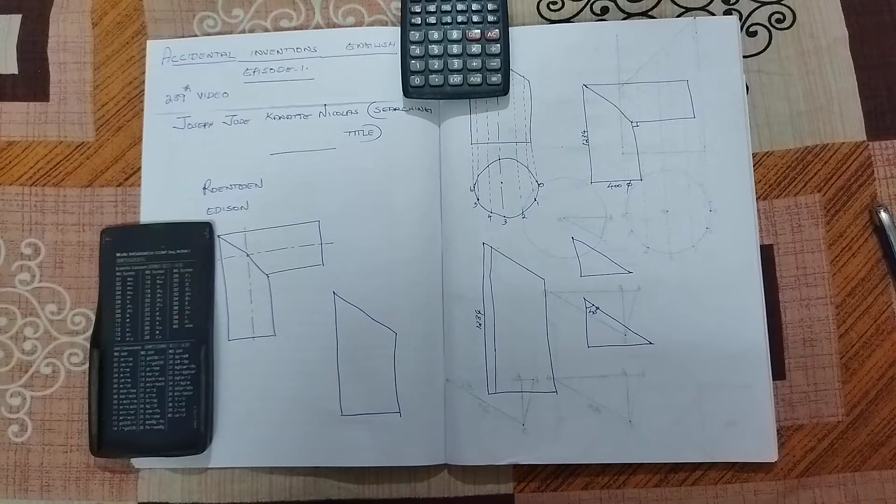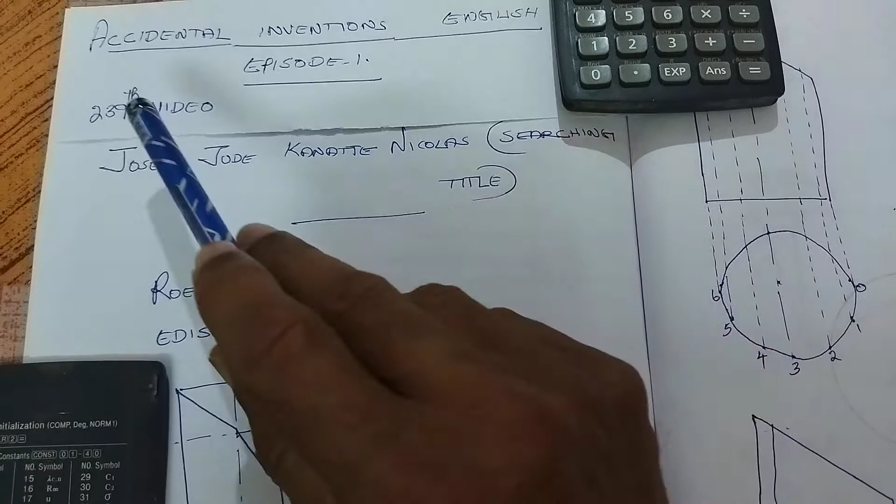Sometimes you may be thinking it may be the reason that today I am going to do the 239th video. It may be its reason, sometimes you may be thinking like that. But actually it wasn't. Today I start a new series, and its first episode is the 239th video. This series name is Accidental Inventions, English, Episode 1.

What is the meaning of accidental inventions? You know, most of the inventions have happened accidentally.

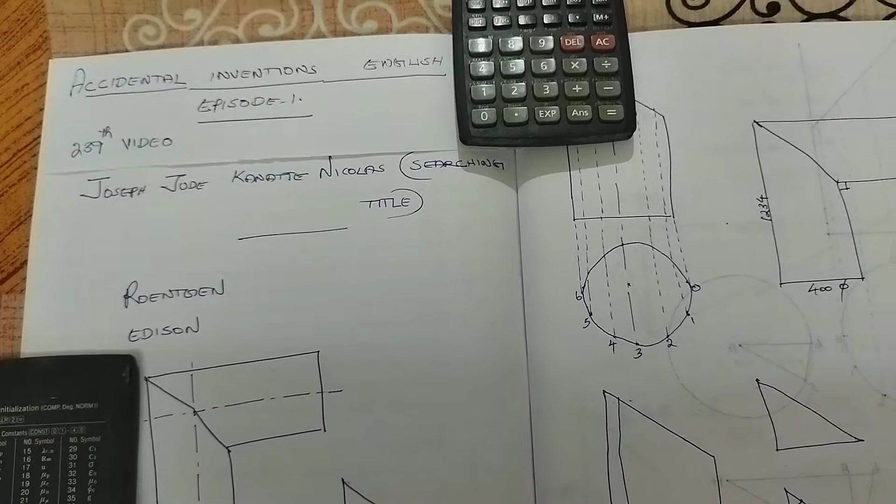If Röntgen invented X-ray, it was also an accidental invention. He wasn't trying to invent X-rays. He was in his experimental workshop experimenting on some other things, trying to invent something else. In between, some rays crossed his hands. He feared and removed his hands from there.

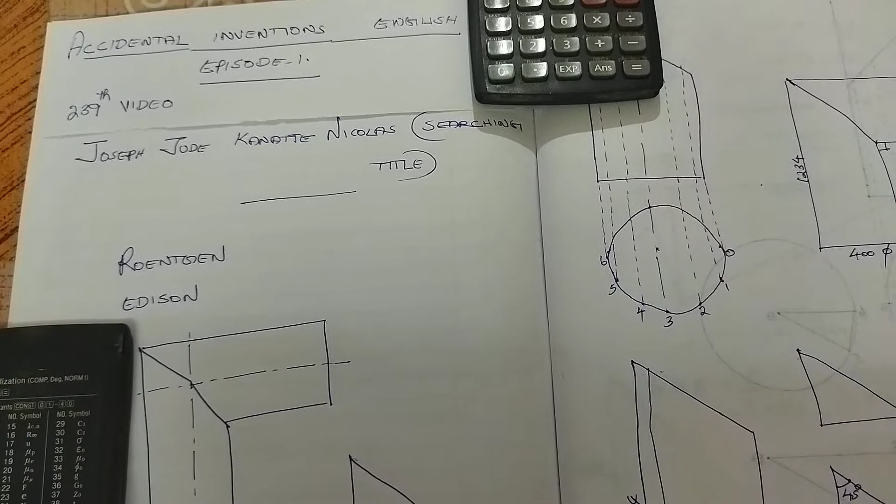Inventions happen accidentally. Some of the incidents happen accidentally, and when compared with this kind of inventors, this kind of scientists...

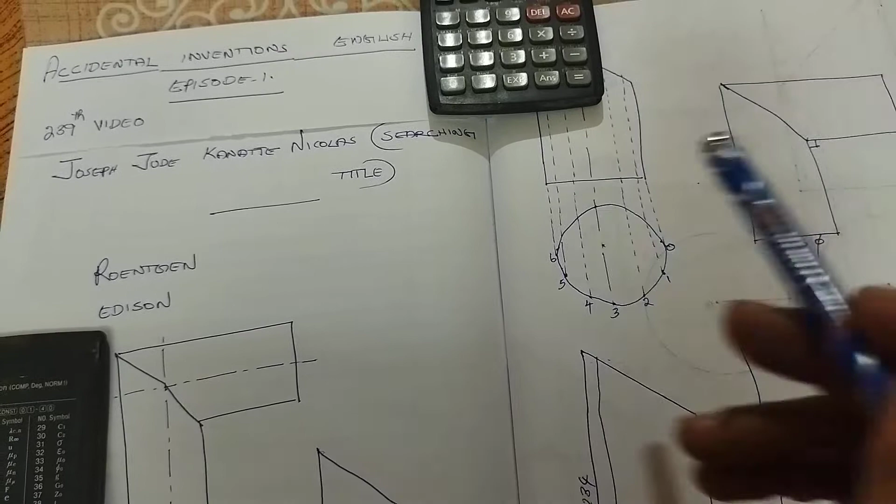Now I told about Röntgen who invented X-rays. If I say about Edison, he had invented nearly 2,500 good things. He has the patent of nearly 2,500 invented things.

But most of the inventors weren't able and expert, or they weren't brilliant when they were so young, especially in their childhood. They weren't expert, they weren't brilliant. Once, when Edison was a small boy, he could see...

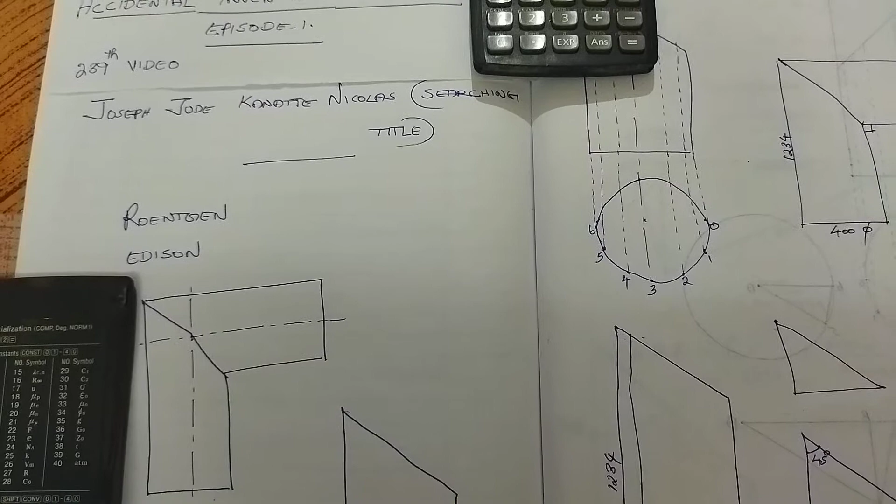one hen sitting on the eggs to give birth to its new kids. He watched it so curiously, and he was doing his first invention.

Now I told the word invention, but if I was writing that word in letters, I would have put an apostrophe above the invention, because what was he inventing in his childhood?

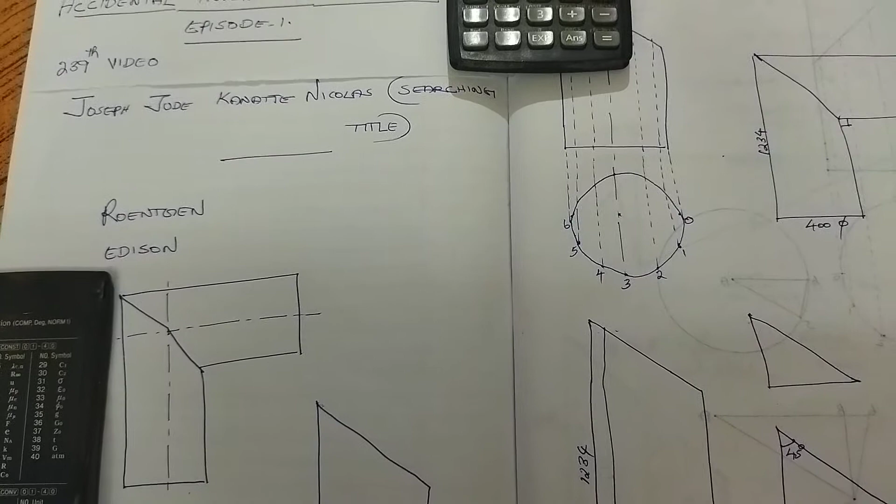He saw a hen sitting on the eggs to give birth to new kids. He too brought some eggs and started to sit on those eggs to give birth to new kids. His mother saw it and she scolded him. That is the childhood incident of Edison.

When compared with the childhood activities of some scientists, or the fearful atmosphere of these scientists, it means Röntgen also feared when X-rays crossed his hands. It was an accidental invention.

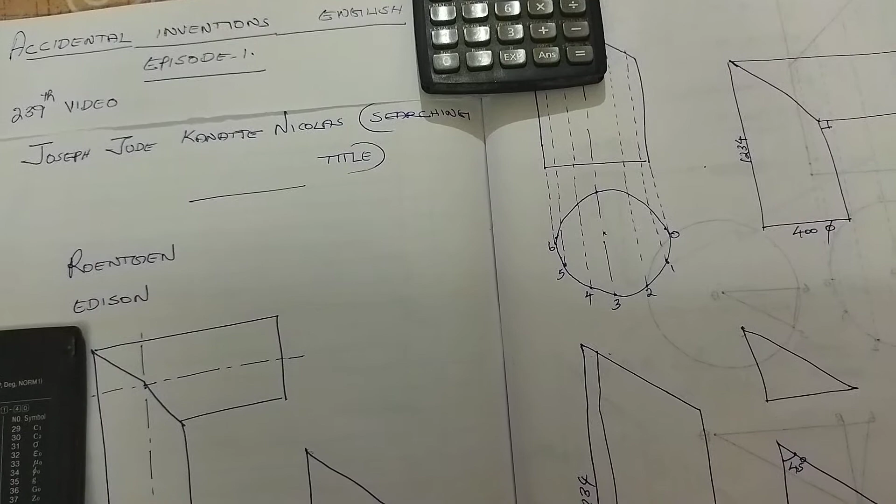So when we compare with so many inventions, most of the inventions happen accidentally. I too have got some accidents - it was road accidents, but I don't like to say about those road accidents now.

I would like to say about some accidental inventions. I too didn't think I may reach invention. I haven't invented anything like Röntgen, Edison, Newton or some other great inventors.

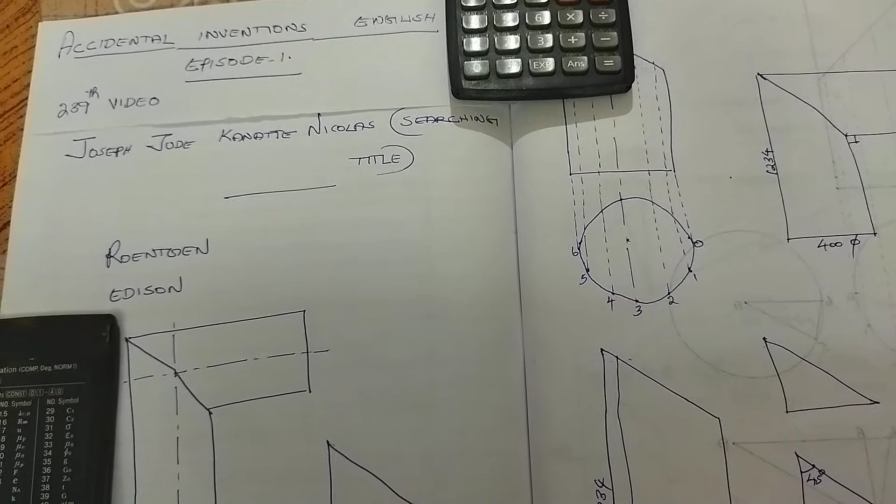But in my journey from fabrication to fabrication, so many calculations I had to do, so many developments I had to do, so many trigonometrical scientific calculations I had to do. I had taken a lot of time for those calculations.

So in between some calculations, I have thought, will there be a relationship with this value and the value of the origin? I will explain it when this video reaches its ultimate stage. We shall go to the matter.

I am so interested in fabrication, especially its developments. You know what is development. In so many videos, I have told you and I have taught you what is development.

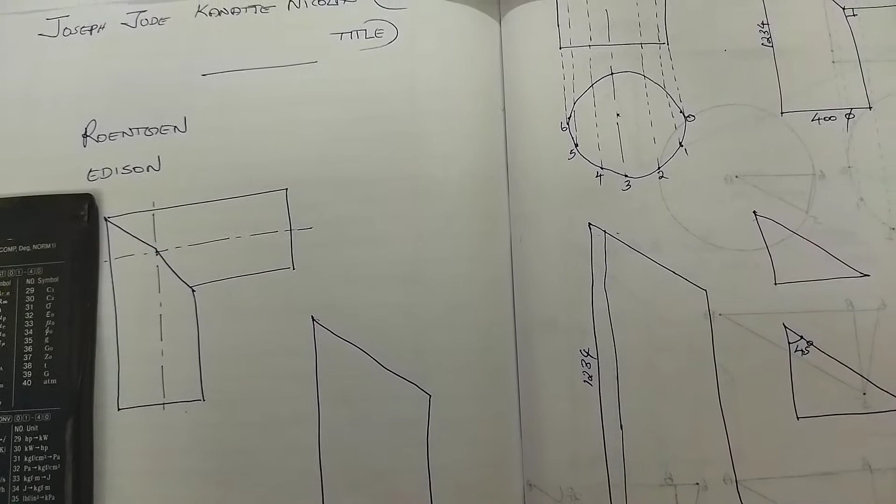If you make a cone, or if you make a square-to-round job, or if you make some other rolled jobs or bent jobs, before it is rolled or bent, it was in a plain sheet, a plain plate as a plain sheet or plain plate. It will be cut in different lengths, widths or different shapes. This shape, before it is being bent or rolled, there will be a shape.

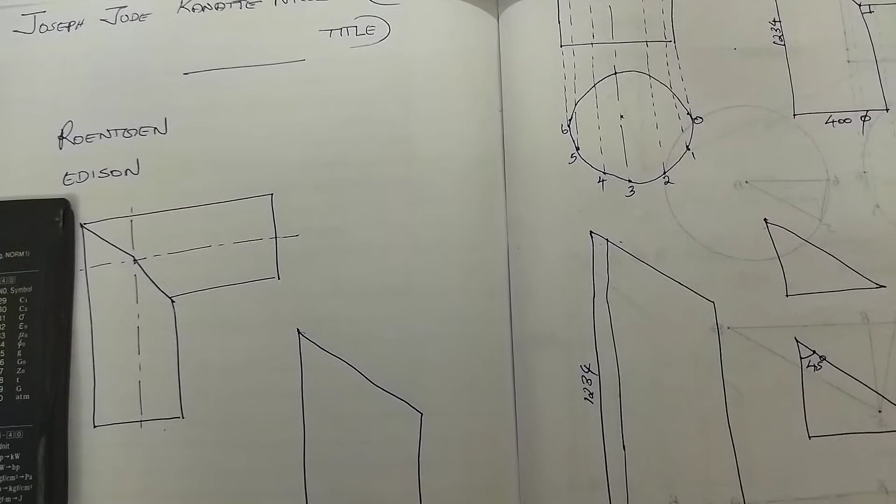There will be a structure. This shape is called development. If we have to make a cone, before making the cone, before bending, before rolling, it will have a shape. In that shape we will mark, cut, and be ready for rolling. Before rolling or bending, it will have a structure, one shape. This shape is called development.

Especially, I had to make these kind of pipes so many times. It is the approximate structure of a pipe which is going through a 90-degree bend. If we have to make this kind of pipe at 90 degrees, one pipe can be used and it has to get this kind of profile cutting.

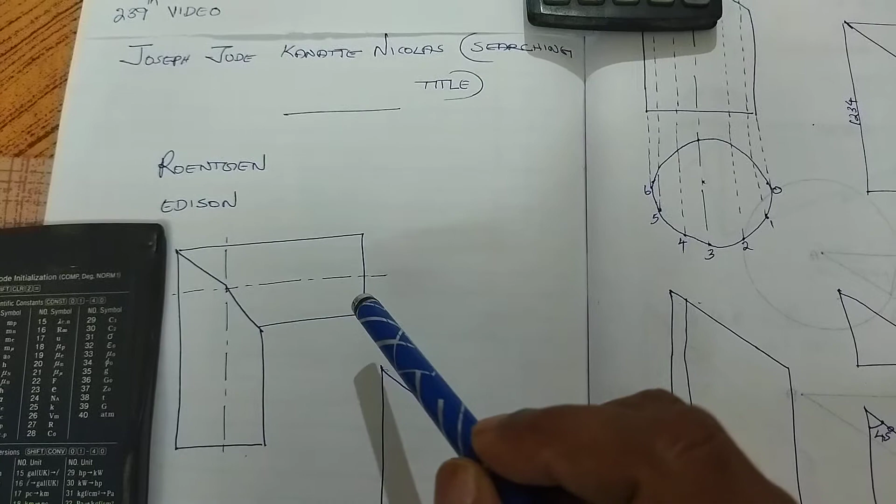When I did this sketch, it is not in a straight line because I was using hand sketches only. I didn't use scale or compass or protractor. You have to use scale, protractor, set square, compass and everything for writing these sketches in your notebook because you are studying only. Now I am teaching you with this kind of freehand sketches.

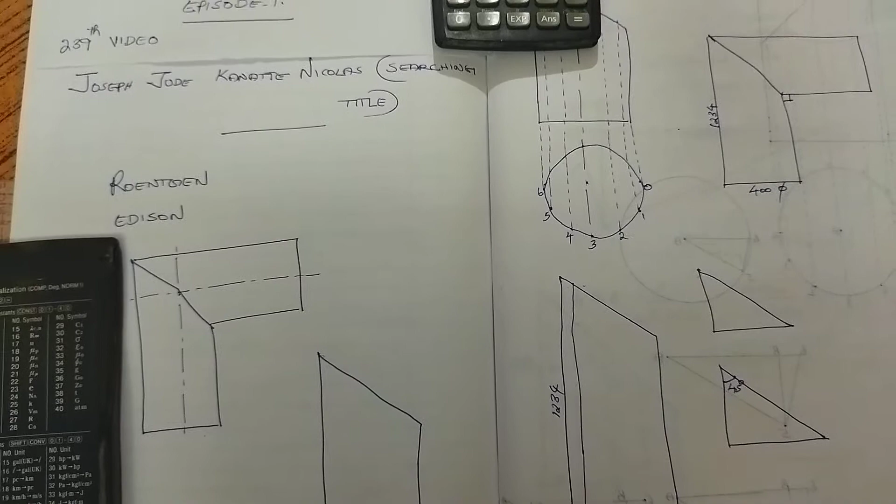If we have to make this kind of pipe, it can be cut in different lengths. This length and the next part's length, this length and this length, all lengths are different. If we cut this kind of pipe, different measurements have to be added: it is the lengthiest side, it doesn't have more length also, and it is the shortest side of this pipe.

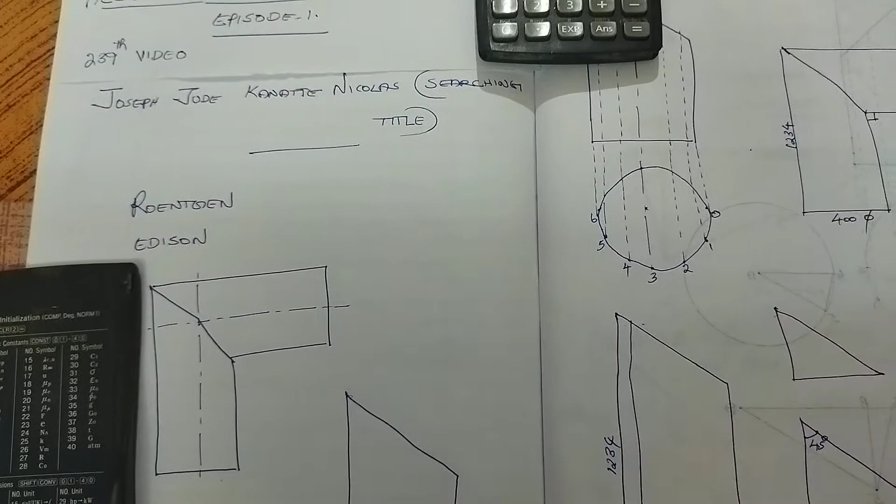So we can cut one pipe and make it like this, or we can roll or bend a plain sheet or plain plate and make it like this also. Both times we need calculations, trigonometrical calculations.

I have just drawn the picture of only this pipe here. It isn't a plain sheet or plain plate - remember, it is a pipe. We have to make this kind of pipe.

For that purpose, what do we have to do? We have to divide this circle. Its bottom is circle, its top is circle, in between every portion is circle, but it is the view of elevation, front view. So we are seeing it in this form. If we look from the top side, we will see a round shaped job.

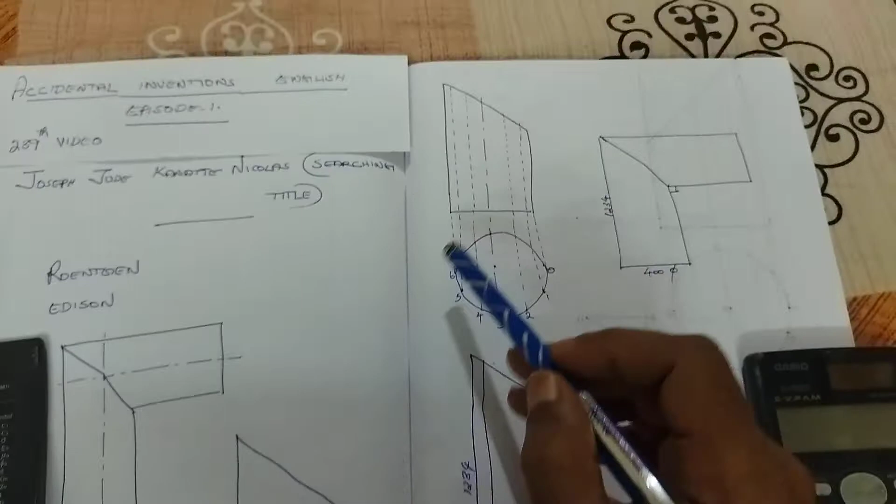Once again I have written it here - this is the elevation of this pipe. What is elevation? Elevation is the front view of a job. Its top view, when we look from the top side, is called plan. This is plan, the view from top. When we look from here, we see its front side, that is this side.

Okay, if we have to make its development, we have to divide this circle. It is a round shaped job like this. We have to divide it into 12 equal parts.

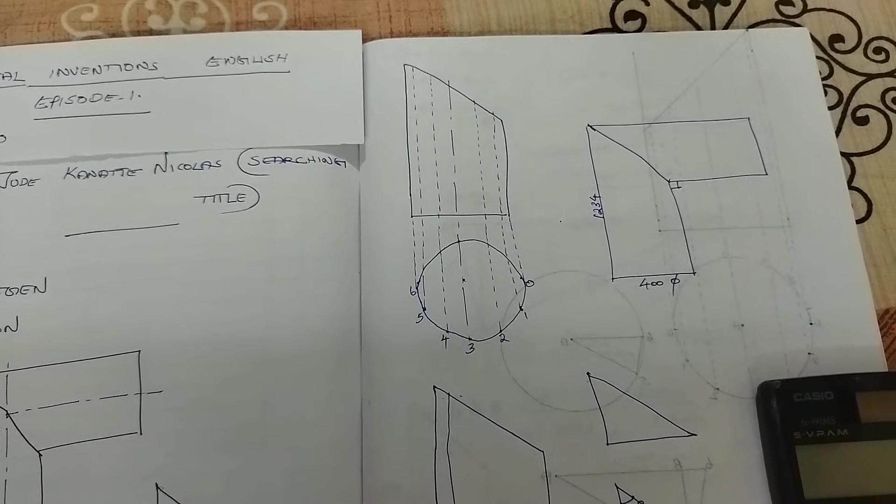If it is bigger than this pipe, 12 may not be enough for you. If you think 12 is not giving accuracy, then you have to divide it with 16 or 20 or 24 or bigger numbers. If it is a small pipe, there is no need to divide it with 12 - you can use 8 divisions or 4 divisions also. That is according to the diameter of the pipe.

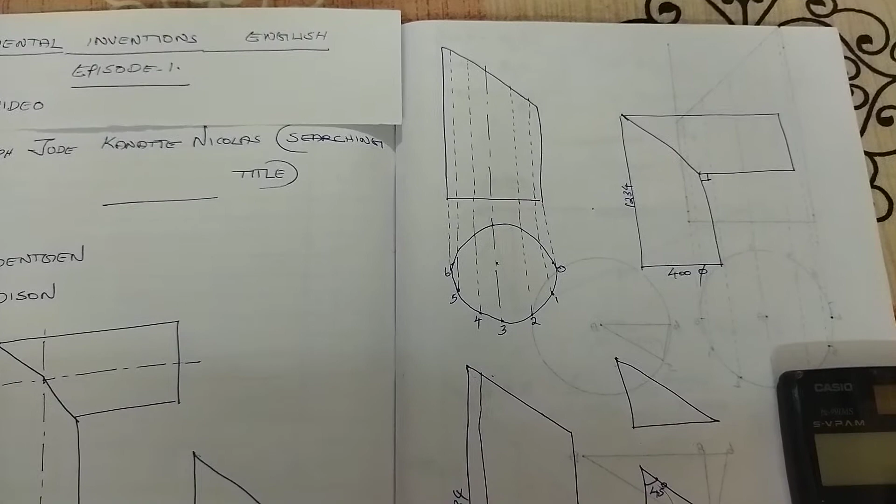If it is bigger, there should be more divisions for accuracy. Now I divide it into 12 parts. Most of the time I have got to divide it into 12 parts, then I had to undergo a lot of calculations.

Now we are going to make this kind of job. For its measurement, for example, we can think its length on the top side, the lengthiest side, is 1234, and its diameter is 400. And this pipe...

gets bent at 90 degrees. If it is a 90 degree bend, these two cuttings will be at 45 degrees. From here to here there will be 45 degrees, and here to here also there will be 45 degrees. 45 plus 45 is 90 degrees - 90 degrees it is going.

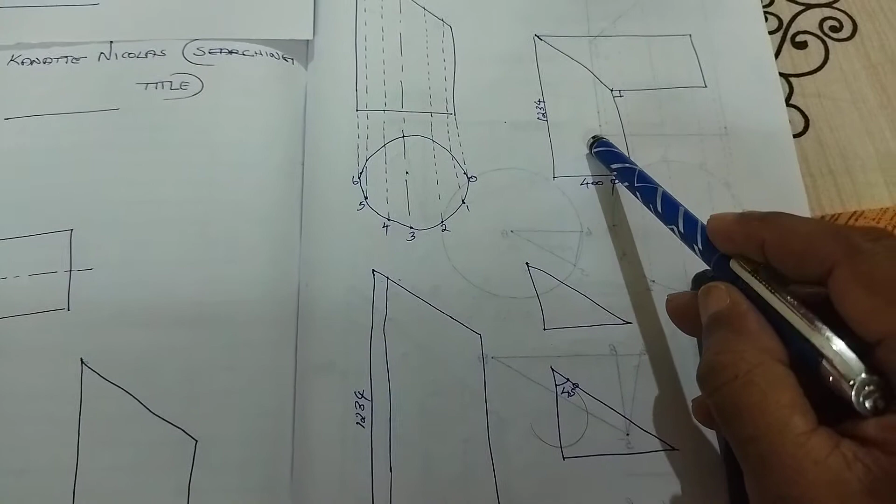So we shall make a pipe in this measurement. For making this pipe, we have to divide it into 12 equal parts. 0 to 1 is one part, and 1 to 2, 2 to 3, 3 to 4, 4 to 5, 5 to 6 - then it is 6 parts.

It is the half portion. This half portion has to be added here also, then another half portion will come - half portion plus half portion - one full round will be developed.

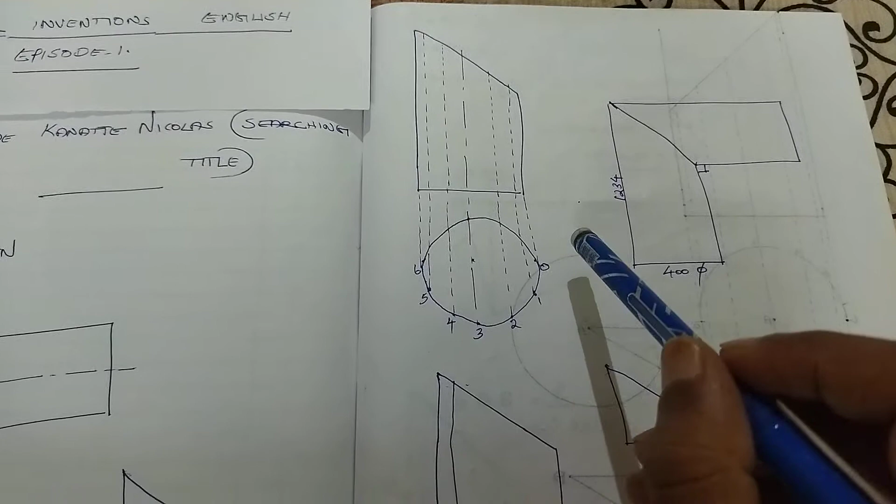I have used hand sketches, so in between the gaps are not equal. But if you draw this circle with a proper compass and proper scale and everything, 0 to 1 and 1 to 2 and all these measurements will be in equal distance in plan.

But this distance, 0 to 1 distance, visible in elevation, is not equal when compared with 0 to 1 and 1 to 2. 1 to 2 will be bigger than 0 to 1, and this one is bigger than this one and this one also.

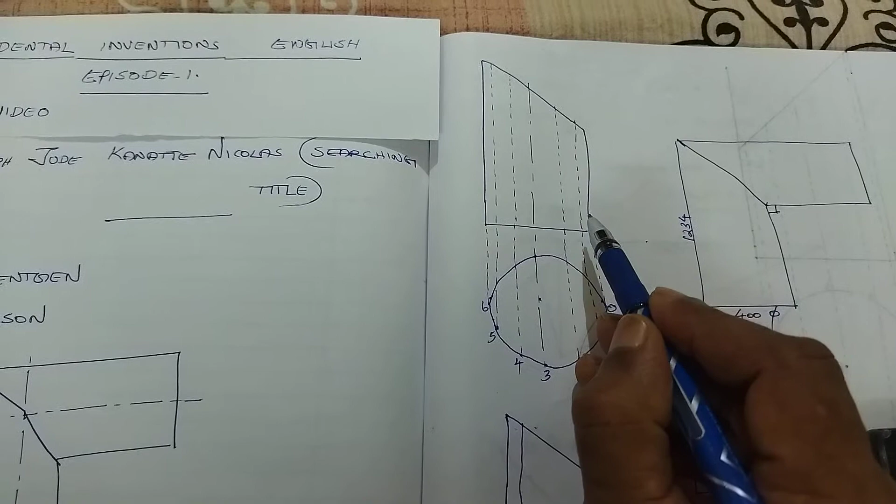And another thing - this 0 to 1, this 0 to 1, and this 6 to 5, here to here is 6 to 5 - these two widths will be the same, and widths from here to here, it means 5 to 4 and 1 to 2, will be the same.

This 0 is the point in round shape which is visible in plan. This 0 starts from here and reaches up to the bottom of this pipe. So from here to here is 0, here to here is 6.

But in elevation, 6 is visible from here to here, though it is top view. So in top view, we can see 6 as one point, we can see 5 as one point only, but here it is visible as one full line.

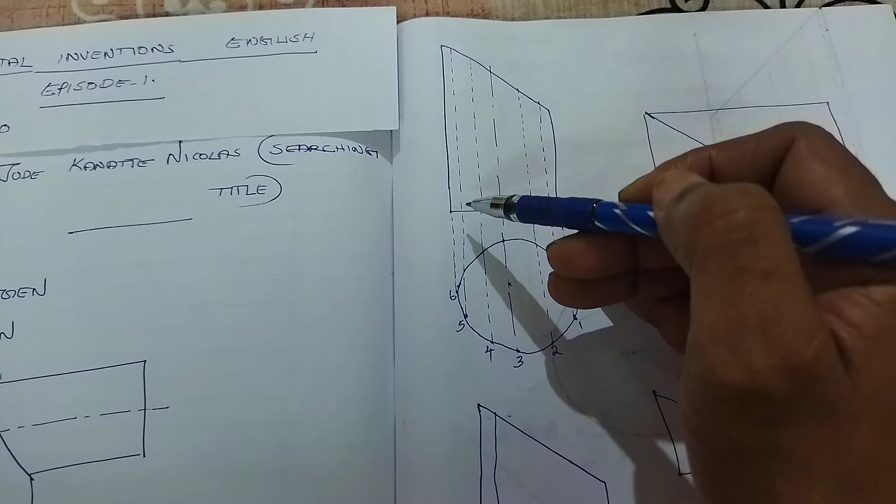This full line, 5, comes one more time on its other side. Only half a portion is visible; the other half portion is there too. So from here to here is the line of 5. Like that, one line will be on its far side also. One line is here and another line is here.

When we look from here, we see only this line of 5. That is this line. But if we look from the top side, we can see the 2 points of 5. This is 1 point of 5. This is another point of 5. This is 1 point of 4. This is another point of 4.

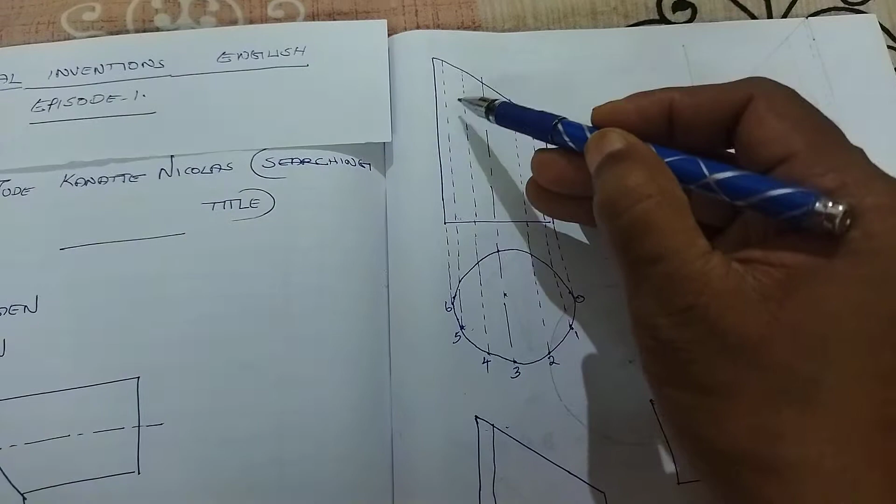But in elevation, we can see the full length of 4. From here to here is 4. But the opposite side 4 isn't visible here. But you have to think another 4 is there on the opposite side of this elevation. Okay.

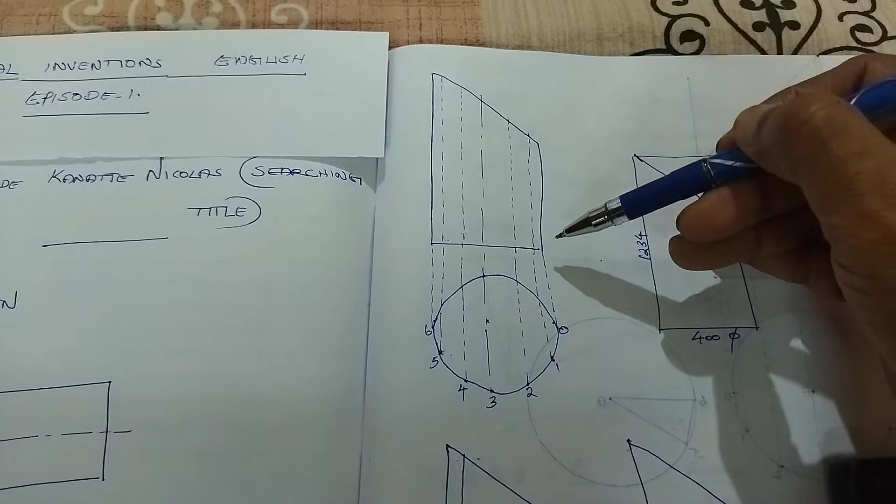So first of all, for making its development, this length differs from the length of 5, the length of 4, the length of 3, the length of 2, the length of 1, and the length of 0. When it reaches 0, we get the shortest length. This is the lengthiest side, and all lengths are different. And this gap is also different in different areas in elevation.

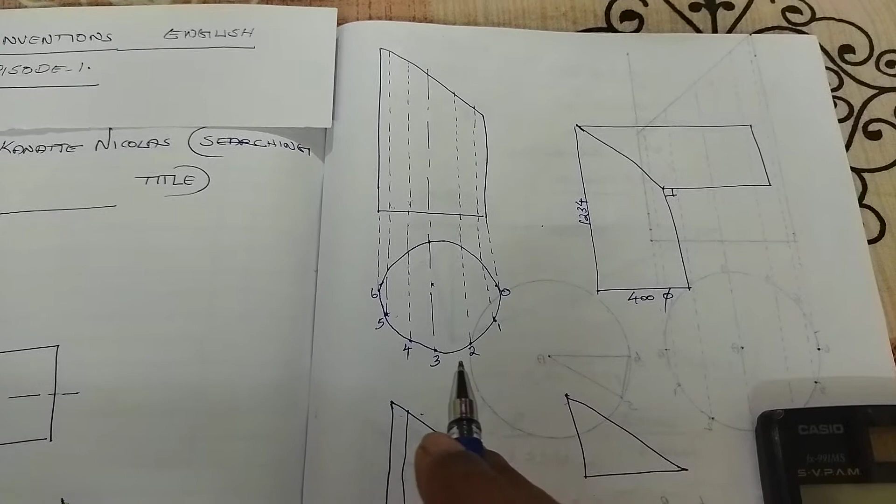But in plan, this measurement is visible as true length. This is exact length. So we can call this length from 0 to 1 in the curved portion true length. But this 0 to 1 is visible. This is the 0 line. This is line 1. From here to here is the true length, and this is non-true length because it is visible from this side only. If we look from this side, the points in the approximate center area will be visible as an approximate straight line.

So this much of curved area will be visible as approximately that much. But here a curved area is there. When we look from the top side, we see true length. But when we look from here, it will have a curved area; we see more curved area. From here, looking to the center, we see mostly plain area. When we look very near the 0 to 1 area, we see not an approximately straight area but more curved area.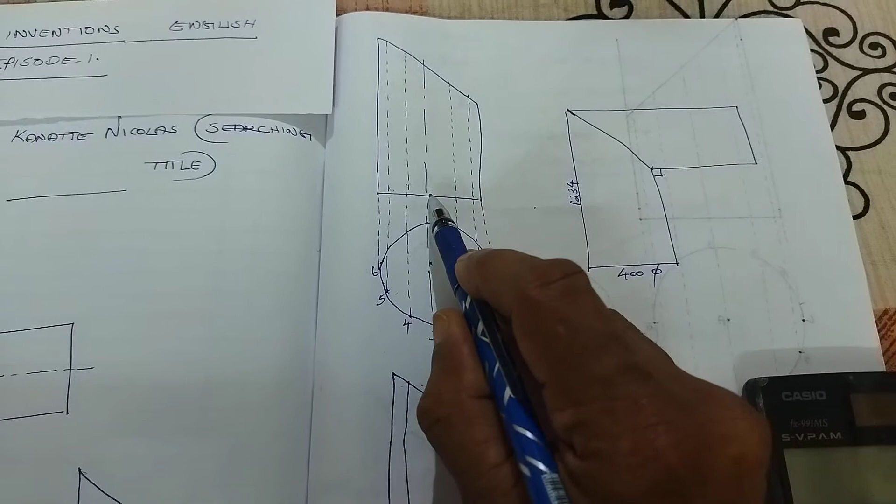So from here to here is only a little length, and here to here is much bigger. This length and this length are the same. When I drew it with my hands, this length got some more width, but it isn't actually true. When you do it in your notebook, you have to use proper divisions and draw proper straight lines. Then from here to here, 3 to 2 will be equal to this 3 to 4, and this 1 to 2 will be equal to this 4 to 5. Okay. We have to make this kind of job.

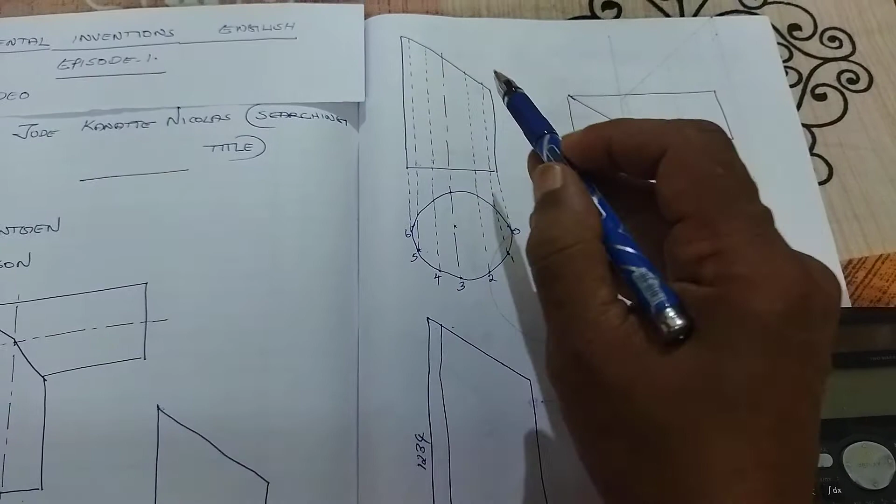Its first length has to be 6. We already have that measurement, 1234. And this 5, this is the line of 5. We have to find it out. How will we find it out? To find this 5, first of all, we have to get this measurement. If we get this measurement with this measurement and this degree, you know this degree is 45 degrees. We told about it first. I have just drawn this triangle here also.

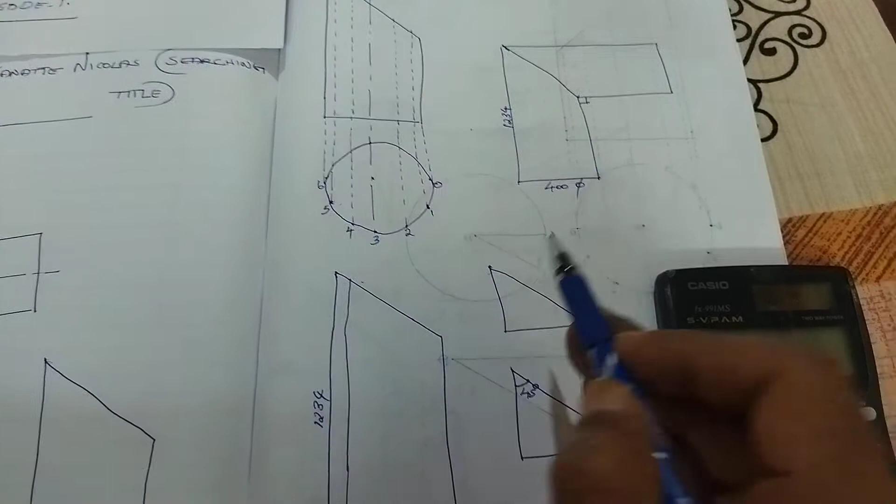This line is this line, and from here to here one line is there, that is this line, and from here to there one line is there, that is this line. If we get this line, we have to get this line; that is our aim. With this line and this degree, 45 degrees, we can find out this length, how much is coming from here to here. If we find this length and decrease it from 1234, we will get the length of 5 from here to here.

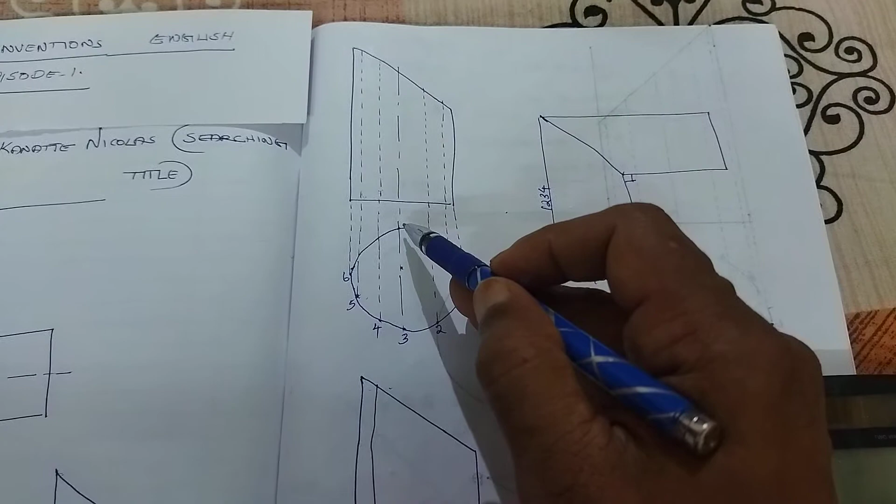Like that, we have to find out all measurements: 4, the 3 line, 2, 1, and finally 0. It doesn't have to be found out twice. If we have found out 1, it can be used for its opposite side also. If we have found out the measurement of 2, it can be used for this 2 also. If we have found out the measurement of 3, it can be used for the 3 on the opposite side. Okay. For finding out this measurement, I had to undergo so many calculations.

Once again, I have drawn those pictures here. In this picture, just listen. How will we be finding out the measurement from 5 to 6? This 5 to 6 is true length. We know how much this measurement will be. But we have to find out the non-true length.

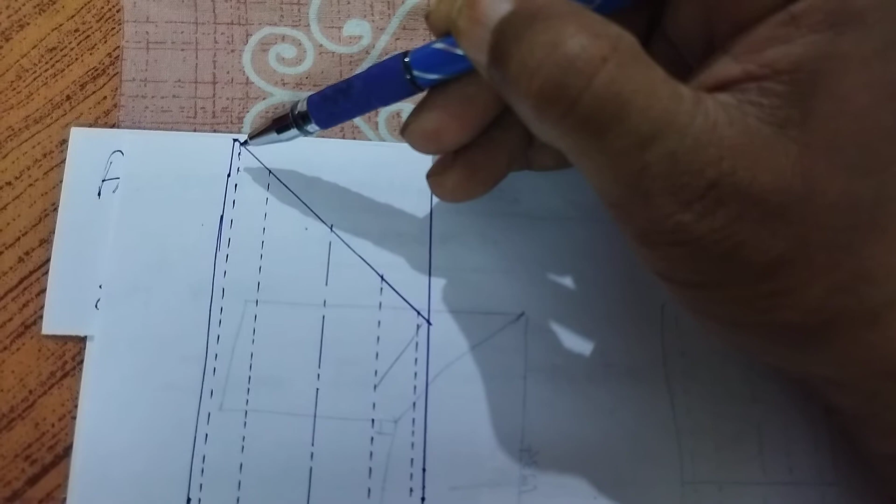This point is 5. This point is 6. This is non-true length. This non-true length we have to find out. Then only we will get the distance measurement from this corner to this point. This point means the 5 line ends here. From this line, if we draw a perpendicular to this line, it reaches here. This measurement we have to get. Then we can decrease this measurement from this total length 1234.

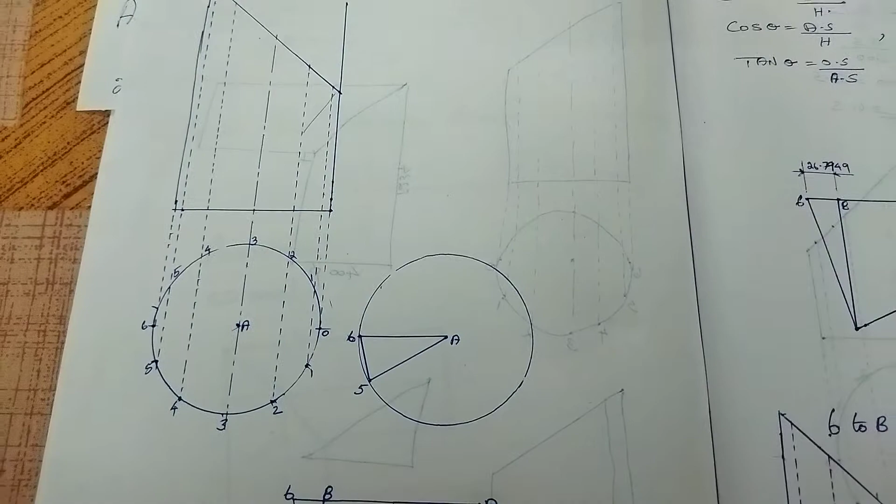Okay, we shall start to find out this measurement 5 to 6. When we find out this 5 to 6, already we will get the measurement of 0 to 1 also, because 0 to 1 and 5 to 6 are the same measurement, I have told you. And 1 to 2 and 4 to 5 both are the same measurement. And 2 to 3 and 3 to 4 both are the same measurement. Okay, we shall find out the non-true length of 5 to 6. How will we be finding out?

We can make a triangle using the points A, 6, 5. A to 6 I have drawn here, 6 to 5 I have drawn here, 5 to A I have drawn here. It is a triangle, but there isn't a 90 degree in this one, because from 5 to the top side we haven't drawn one perpendicular line. We have to make one perpendicular line. In this triangle there should be a 90 degree. That has to be with us for doing trigonometrical calculations.

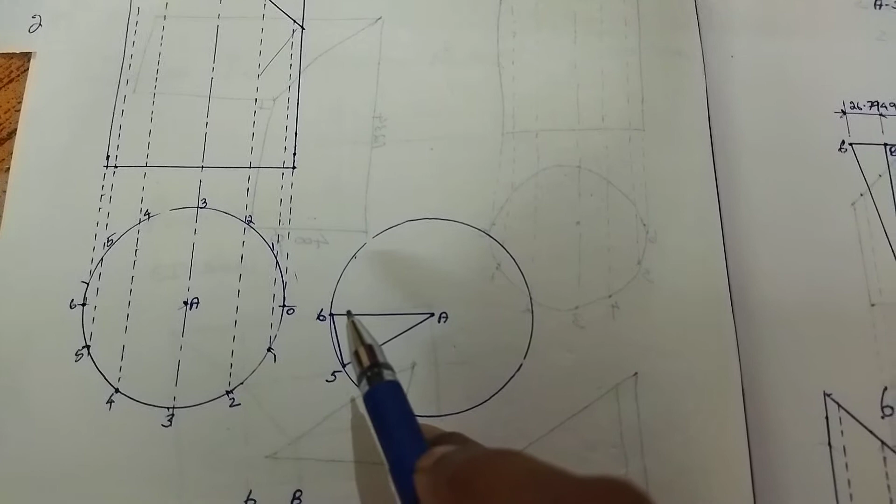Why did we draw this kind of triangle? If we make a line from here to the top side, which will be perpendicular to the line 6A, that has been drawn here. A to 6 I have drawn here, 6 to 5 I have drawn here, and 5 to A I have drawn here. And this 5 reaches in B. Then it becomes 90 degree.

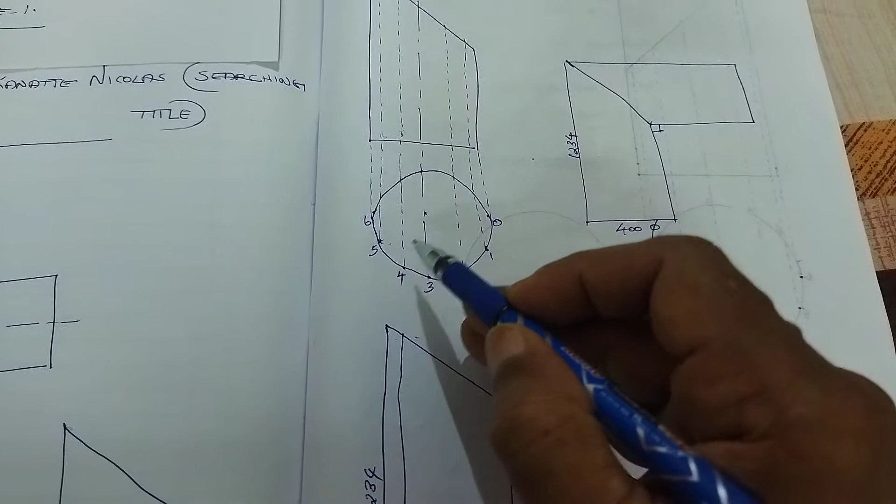If we find out the measurement of A to B, already we will get this measurement 6 to B, because everybody knows this A to 5 is 200, because in the last page we have told our diameter is 400. If diameter is 400, its half, the radius from here to here, is 200. All measurements from the center to the outer line of the round are 200.

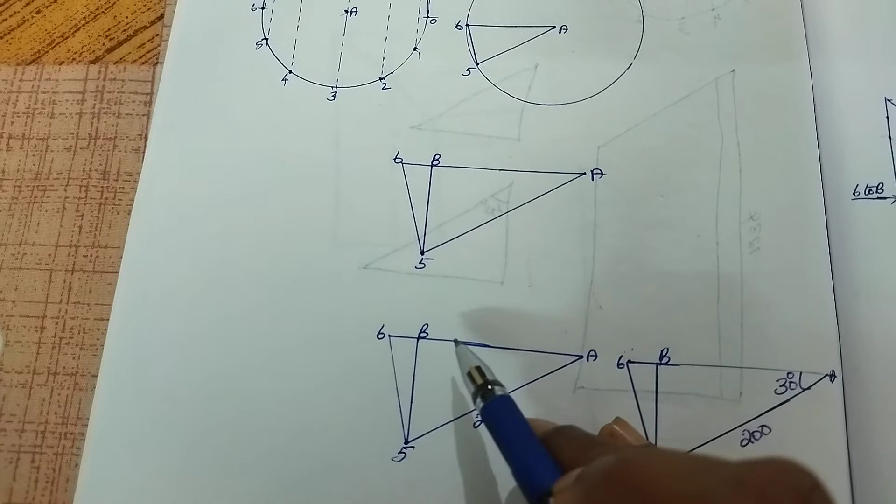Here to here is 200. A to 5 is 200. A to 6 is also 200. Those measurements I have written here. If we get the measurement from B to A, already we will get the measurement of 6 to B, because 6 to A is 200. 200 minus B to A will be the measurement from 6 to B. So we will get this measurement.

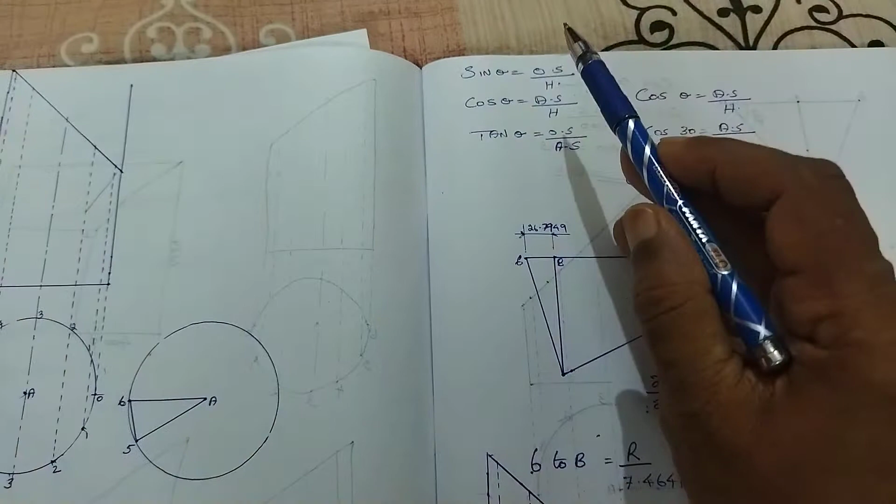If we have to find out 6 to B, we have to use trigonometrical calculations. I have taught you so many trigonometrical calculations. For that purpose, we have to use sine theta, cos theta, tan theta. Sine theta is opposite side divided by hypotenuse, cos theta is adjacent side divided by hypotenuse, and tan theta is opposite side divided by adjacent side.

Remember, we have divided this circle into 12 parts. 1, 2, 3, 4, 5, 6. Then again, the 7th portion is 5, the 8th portion is 4, the 9th portion is 3, the 10th portion is 2, the 11th portion is 1, and the 12th portion is again 0.

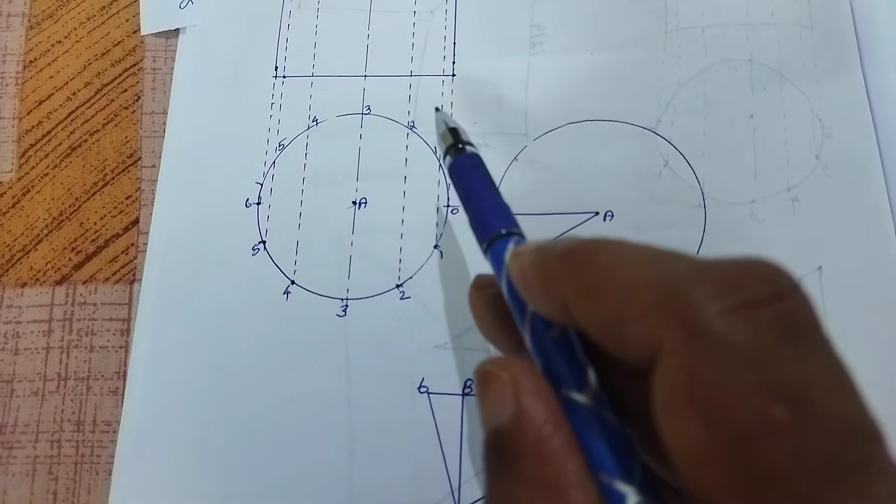So, for making one circle, one line has to start from here, and we have to draw one round making 360 degrees. 360 degrees reaches in 6 to A again. We start one round from the line A to 6, and it has to have 360 degrees, then again it reaches in 6. Two lines are matching. That is 360 degrees. So, this 360 degrees is divided by 12.

1 part's degree will be formed. How much it will be? What is the degree of 360 divided by 12? That will be 30 degree. This is 30 degree. This is 30 degree. This is 30 degree. I have written here 30 degree. This kind of 12 30 degrees will be forming, then one round full will be formed.

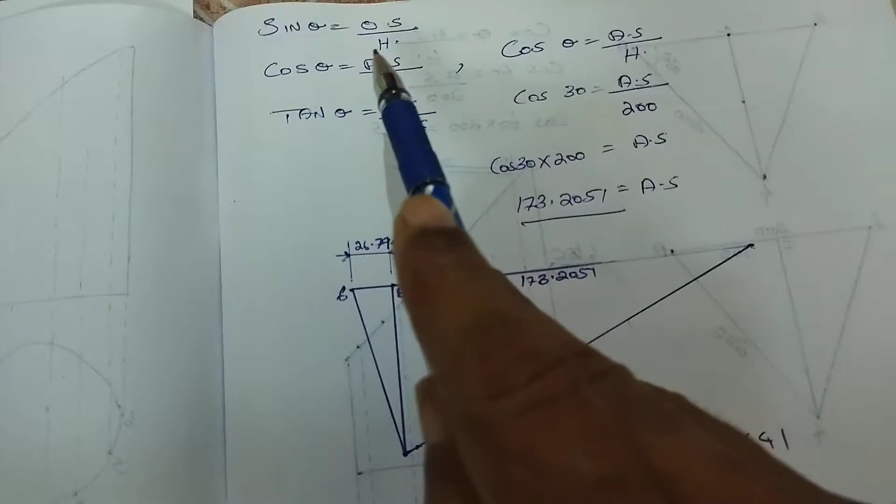Okay. Those all I have described in my earlier other videos. So, we shall come to the trigonometrical calculations. In these 3 formulas, which formula we can use? Cos theta can be used. If we use cos theta, we will have the measurement of cos theta, that is 30 degree, cos 30 degree, and adjacent side we don't have.

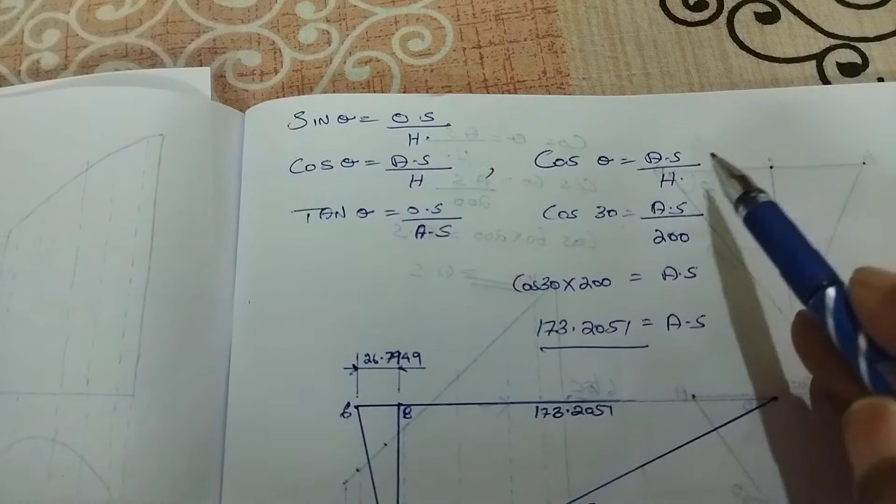Here to here is adjacent side. We have to get it, so we have to write just adjacent side only. Divided by hypotenuse we have. What is hypotenuse? This is hypotenuse. From here to here is hypotenuse. That we have. Okay. So, we shall use the formula cos theta is equal to adjacent side divided by hypotenuse. In this cos theta, theta is cos 30, and adjacent side we don't have, we have to write it here. And hypotenuse 200. From here to here is 200.

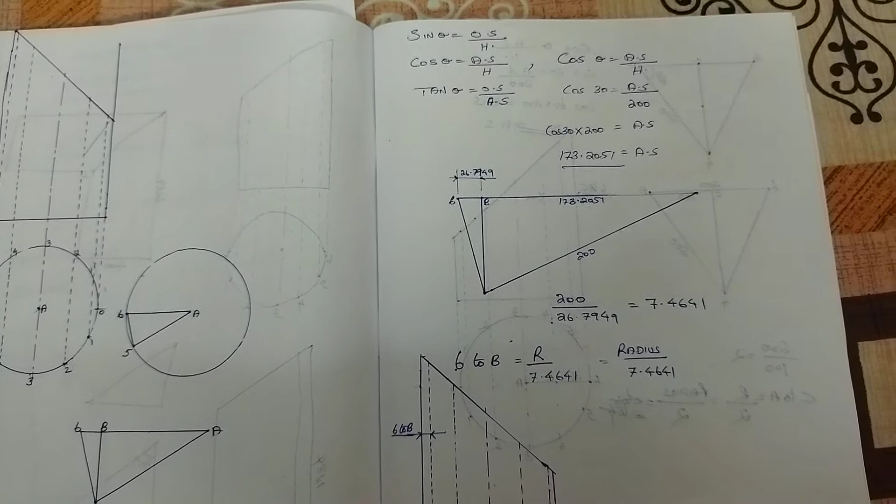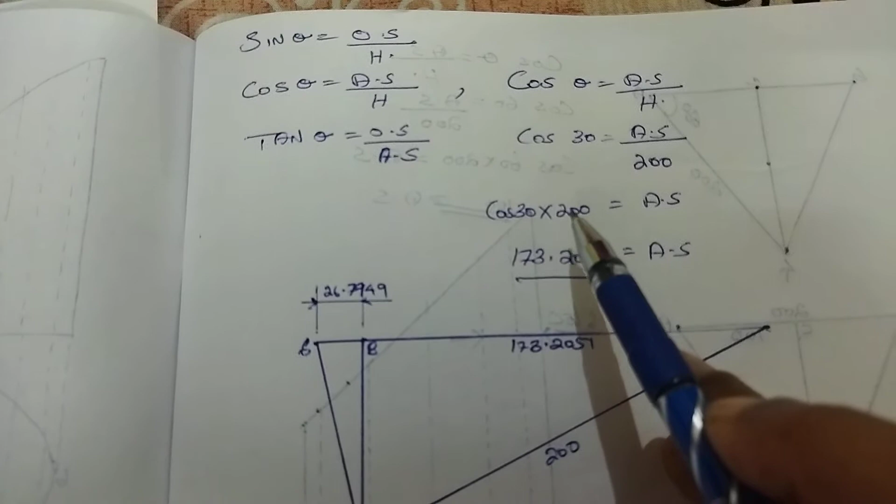Okay, cos 30 is equal to adjacent side divided by hypotenuse. Hypotenuse 200. We have to get adjacent side only. So we have to keep adjacent side here, and we have to take this 200 to the left side of this is equal to. If it is in bottom side, when it reaches the left side of this calculation, it will be in top side. If it has been divided here, when it reaches top side, it will be multiplied. It has happened here. We kept adjacent side here, and we have taken 200 to here. Then it reached top side, and it has been multiplied.

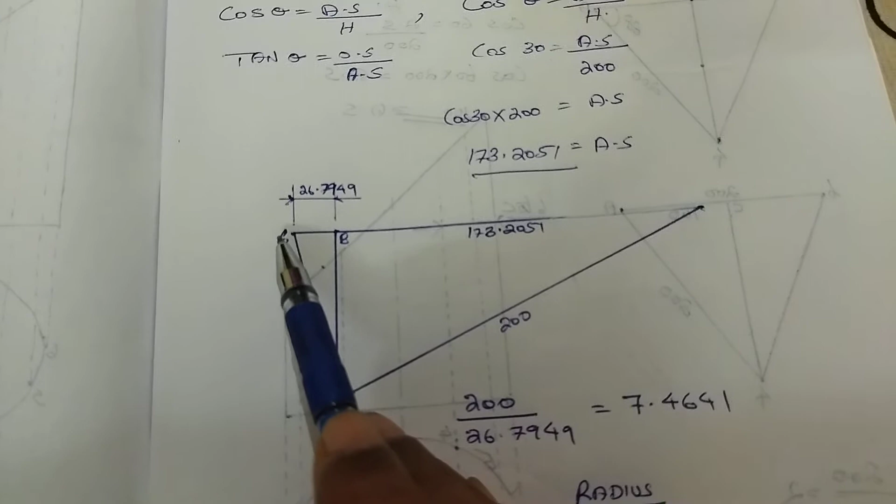Then just calculate cos 30 into 200 in your calculator. Then you will get 173.21. Okay. So what is this 173.21? Measurement from here to here is 173.21. As I have told you, measurement from here to 6 is 200. If it is so, what will be the measurement from here to here? We have to decrease 173.2 from 200. 200 minus 173.21 is 26.8.

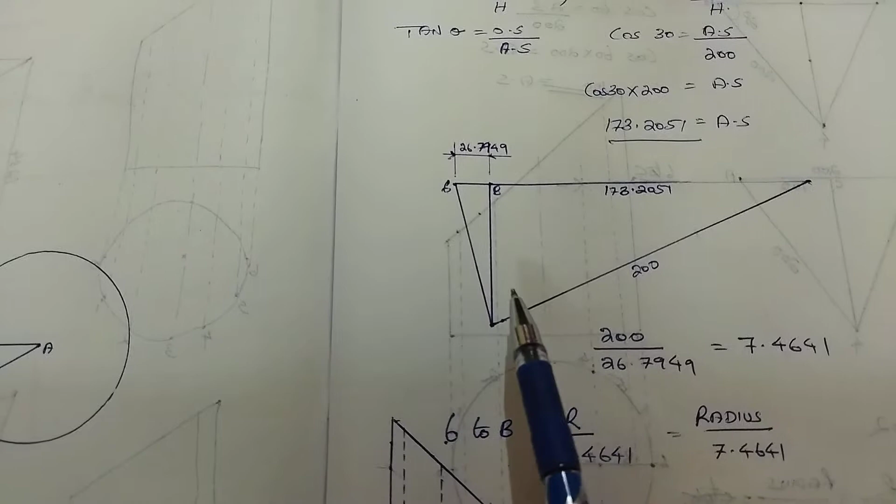Then we go to this measurement. It was our aim. If we have got this 26.8, with this measurement 26.8, and this degree is 45 degree, with this degree and this measurement, we will get this vertical length. Then we can find out the length of 5. Then we can find out the length of 4. We can find out all lines. So, for finding out this 5, 4, 3, 2, 1 and 0, first of all we have to find out this measurement.

How much of calculations we have done? It is very difficult for me. I had to do so many of this kind of pipes every day, and every hour I had to do the developments of this kind of so many pipes. So I thought there will be a relationship between this measurement and its radius. Means if this measurement increases, this radius also may be increased. And if this measurement comes down, this radius also may be coming down. I just checked this measurement in so many circles.

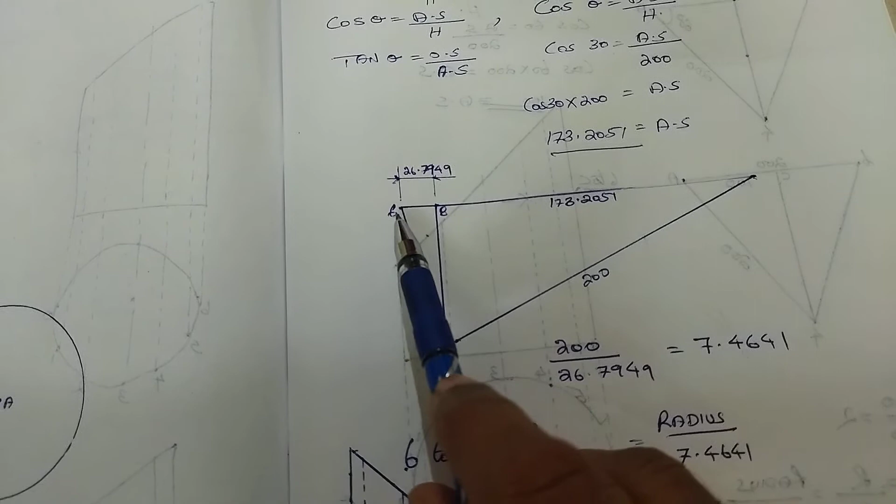So I thought, how many times bigger will be this radius when compared with this 26.8 measurement? Means 6 to B or 6 to 5 measurement. For that purpose, I divided 200, from here to here is 200, with the smallest number 26.8. Then I could find out this 200 is 7.4641 times bigger than this 26.7949. I checked this kind of measurements in so many triangles. Everywhere I could find out this constant 7.4641.

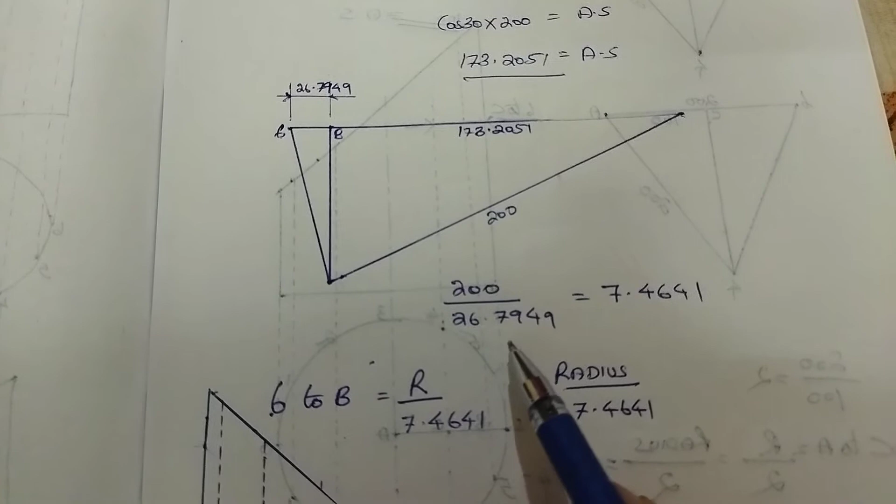This 26.8, 7.4641 times big is this 200. So, why should we do all these calculations? I thought this kind of one formula has to be used, because for finding out 6 to B or 6 to 5, we have to use the formula radius divided by 7.4641.

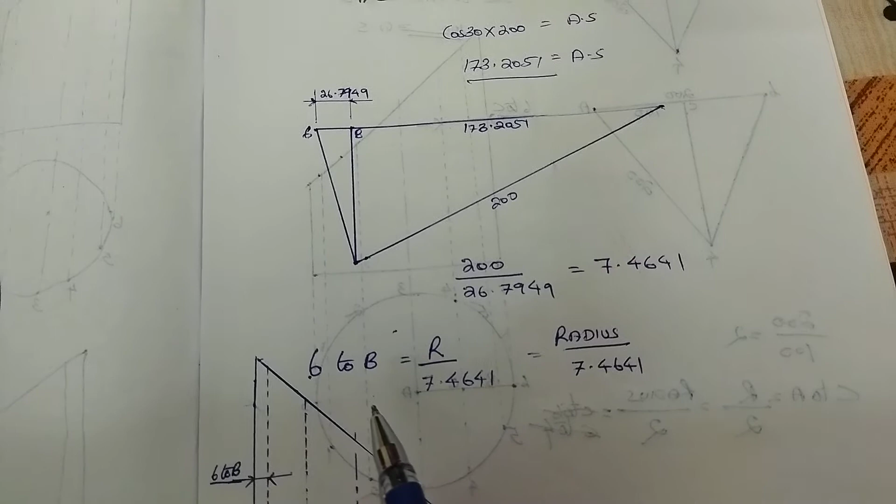If this radius 200 is divided by 7.4641, we get this 26.8, we get this 6 to B, we get this 6 to 5. So I could accidentally, once again I repeat the word, accidentally invent: 6 to B is radius divided by 7.4641. It was my first invention. Okay. It happened accidentally. Most of the accidents are happening accidentally.

So, why did I invent it? Why could I invent it? Actually, I didn't invent it for inventing. Accidentally, I invented it. I invented it for my easy work, for my speedy work. I have to do this calculation very easily. I was trying to find out different methods. Finally, I could reach this formula.

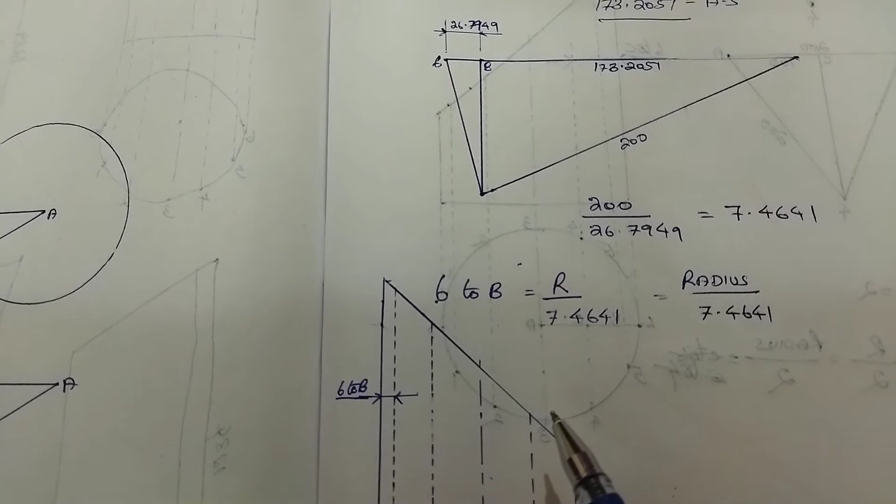So, we will always say as a proverb, necessity is the mother of inventions. Here, it happened actually. This speedy work was my necessity. So, I could invent this formula. For getting speed in our life, we will find out some things. So, speed is the mother of invention, and easiness is the mother of getting easiness to life.

And for all kinds of works, we try our best. So, easiness is the mother of inventions. Necessity is the mother of inventions. Speed is the mother of inventions. Our life has to be happiness. For making happiness, we invent. I invented this one. Remember it. Please note this. I invented it accidentally.

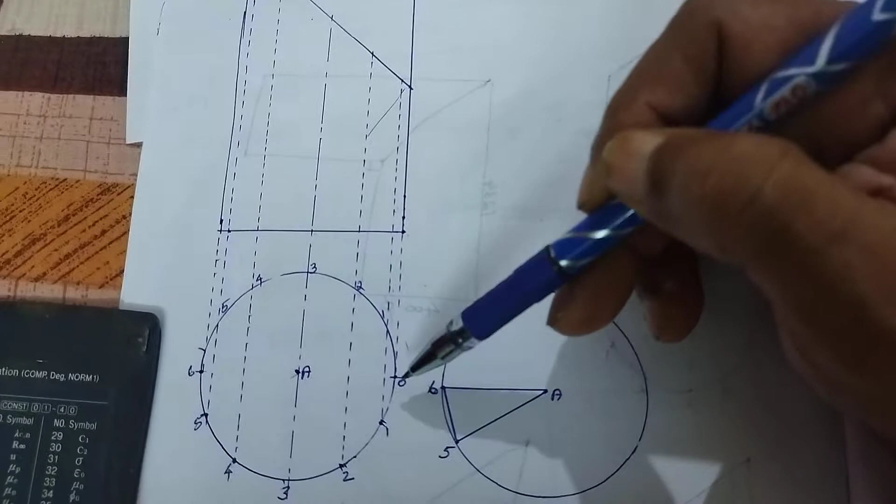So, we could find out the measurement 5 very easily. On its opposite side also 1 comes. That has also been found very easily. When we found this measurement from here to here, already we got the measurement from here to here also. When we find out this measurement, its opposite side measurement line of 1 also will be found out very easily. Okay. Now we got it.

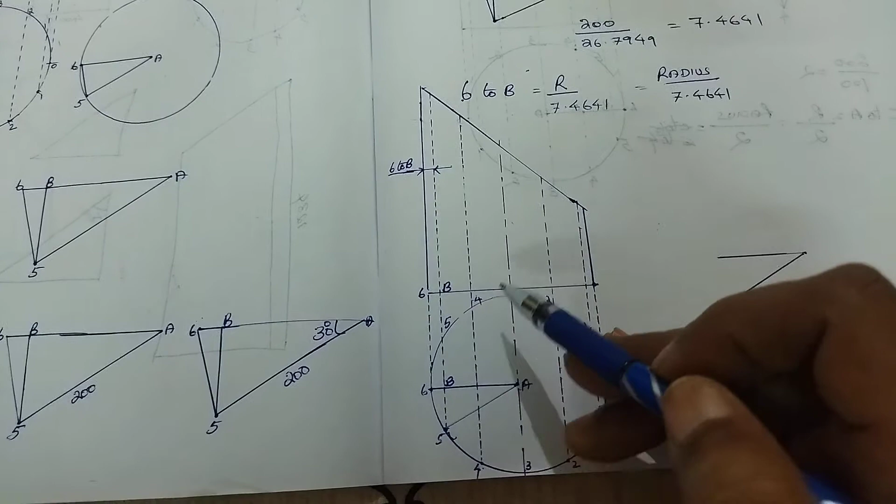Now we have to find out 5. How will we find the length from here to here? Sorry, we found out 5, in between 5 to 6. Now we have to get the measurement of 4. If we have to get the measurement of 4, we have to get the measurement of 4 to 5 or 4 to 6 or 4 to 3. So, for finding out this measurement, we used this kind of one triangle and calculated.

We can make another triangle pointing not 6 to 5, but 6 to 4, because we have to get the measurement of 4. 6 to 4, I have written it here. And 4 to A, I have written it here. And A to 6, I have written it here. Using these A, 6, 4 points, we made a triangle that is here.

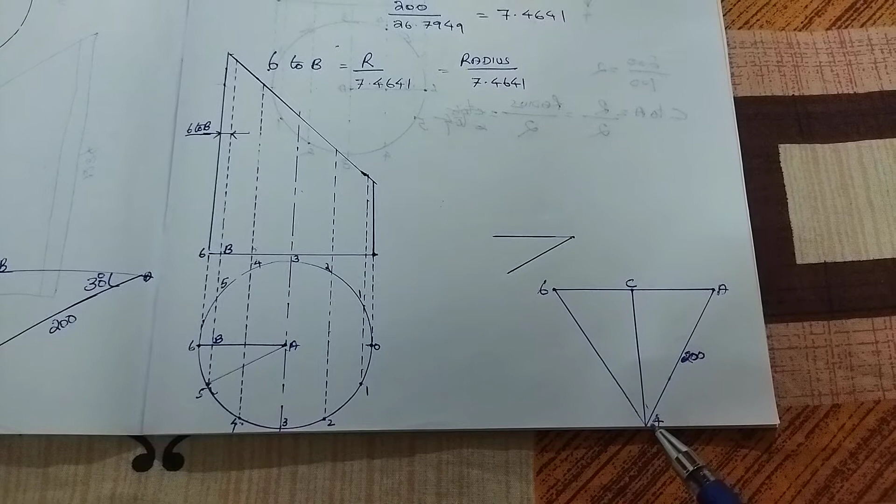Earlier we have done one perpendicular line from 5 to B. Like that, one perpendicular line we have to make from point 4. It has to reach the 6 to A line. Then it will reach C. We know this 200. There is no need for me to say it again because you are engineers or fabrication supervisors or skilled fabricators. These have been described in my earlier videos, so I don't repeat it. This measurement is 200.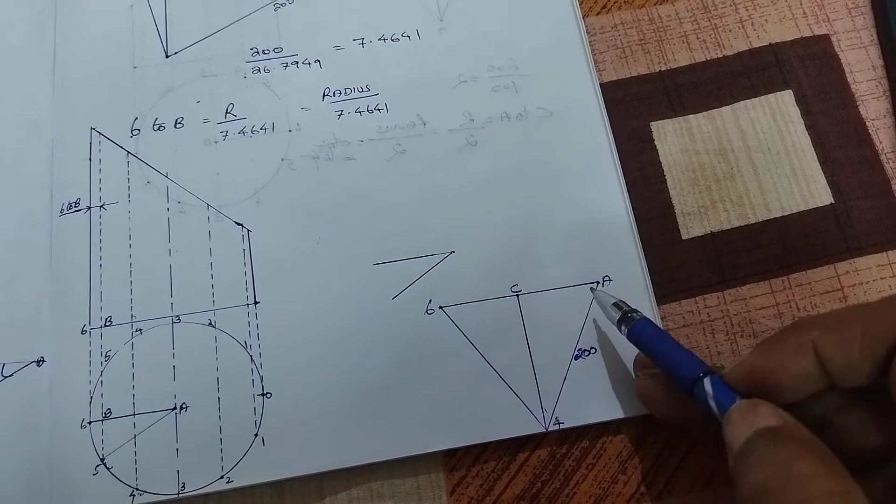Then I ask you what will be this degree. Earlier this degree was 30 degrees, 6 to 5. Now we are making a triangle from 6, A and 4. What will be the angle 6A4? If 6A5 is 30 degrees, another 30 degrees is coming in between 5A4. These two will be added, so 6A4 will be 60 degrees. I have written it on the next page.

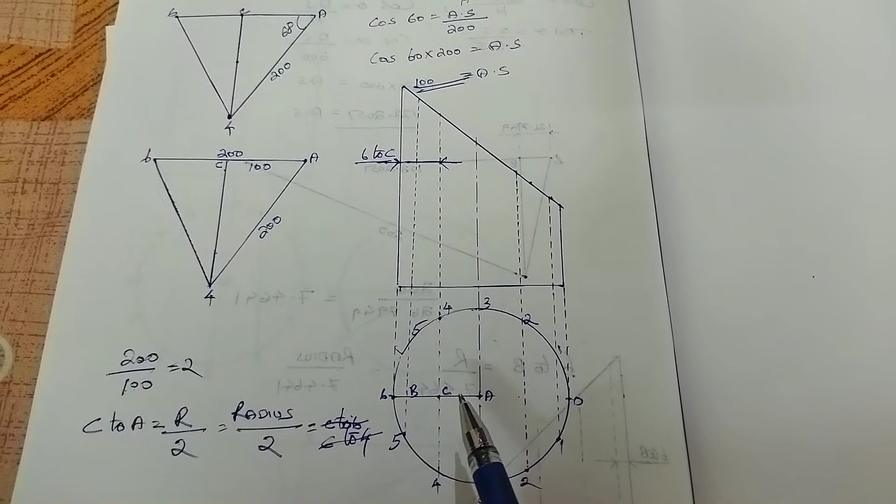So we have to find out the length from A to C. If we find out the length from A to C, what will happen? We can very easily find out C to 6 also, because from 6 to A is 200. 200 minus C to A. So we shall find out C to A. For that purpose also we have to use trigonometrical calculations. Cos theta, again we can use the adjacent side divided by hypotenuse.

In cos theta, theta is 60 degree, and adjacent side we don't have, we have to write it like that. Adjacent, yes. And hypotenuse is 200. We have to find out adjacent side. So we have to keep adjacent side in the right side of is equal to, and 200 has to be taken to left side. If it is in downside, it reaches top side. And if it has been divided, when it reaches the left side of is equal to, it will be multiplied. Cos 60 into 200 is adjacent side.

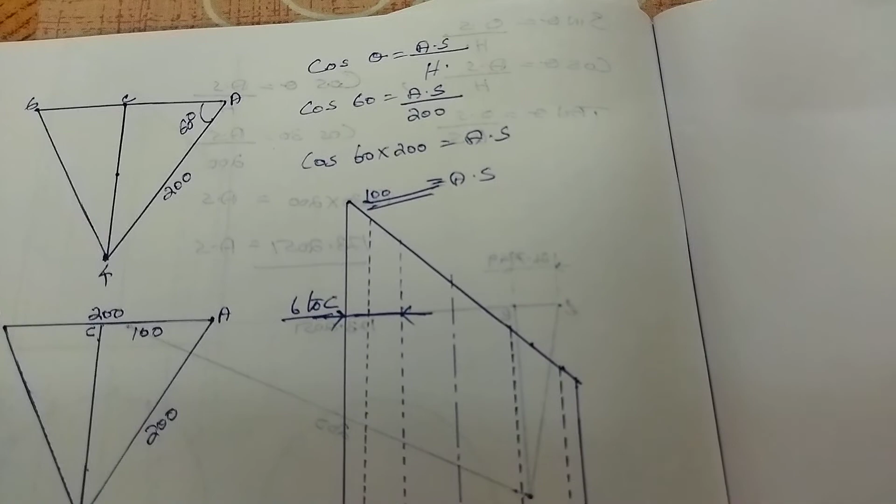Just make one calculation in your calculator. Then cos 60 into 200 will be 100. This measurement C to A is 100. Then I could realize one thing. Why should I make all these calculations? It ends in 0, so we can very easily find out 100 is 2 times lesser than 200, and 200 is double of 100. So I checked this measurement in so many circles, not 200, other sizes like 234, 354, and I just checked everywhere.

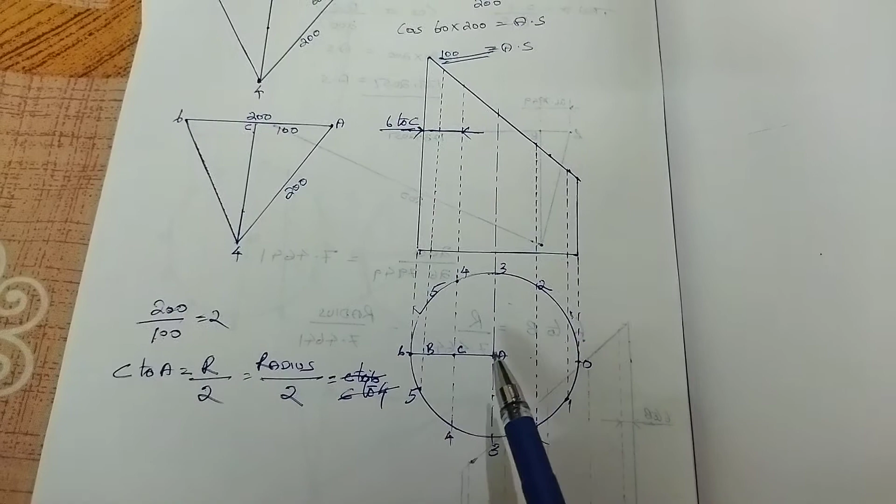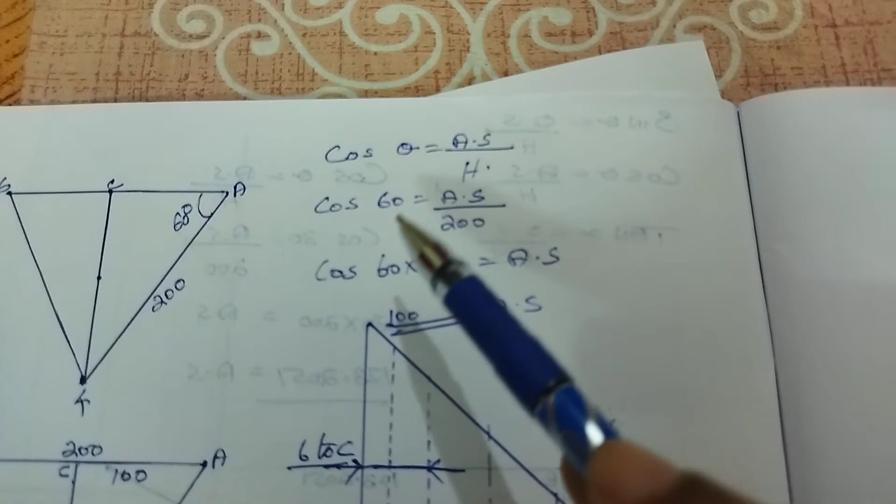I could find out C to A, that means 4 to 3. This is the true length, this is non-true length. From here to here is non-true length. I could find out this C to A is the real half of radius. C to A or C to 6, both are same, because this is 100. If it is so, this also will be 100, because total length is 200. Okay.

So in this A4C triangle, using this 60 degree and this 200, using this formula, we could find out 100. Total length is 200, so if it is 100, this one also will be 100. C to 6 will also be 100. C to 6, in another way we can say 4 to 6. It is non-true length. The 4 to 6 curved length is the actual true length. But we have to find out non-true length.

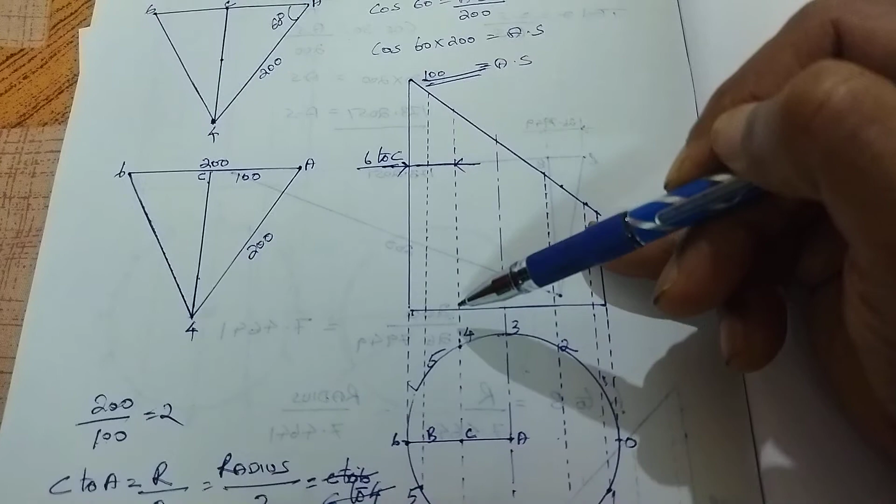Then only, if we have found out this, using this 100 and this 45 degree. In last page I have told you 45 degree. With this 45 degree and 100, we can find out this length. If we find out this length and decrease it from the total length, we will get the length of 4 from here to here. If we have got the length of 4 to 4, we will get the length of its opposite side 4 also. If this is 100, this one also will be 100.

So I checked this 100 and 200 relationship. We can very easily say 200 is double of 100 because it ends in 0. But if it wasn't ending in 0, we wouldn't have told like that. So I checked in so many triangles everywhere. 200 divided by 100 is equal to 2. This measurement C to 6 multiplied with 2, we get radius. Everywhere I could find out. So C to A is radius divided by 2.

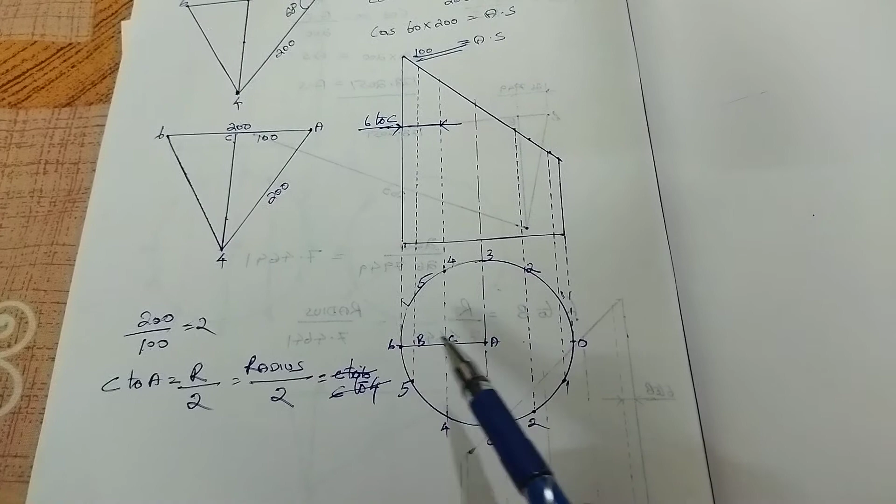Another way we can say C to A and C to 6 both are same measurement. Now we found out both are 100. Instead of C to 6 we can say 4 to 6 also, because this dashed line from here to here is the line of 4. 4 to 6 is also radius by 2. C to 6 is also radius by 2. A to C is also radius by 2. 3 to 4 is also radius by 2.

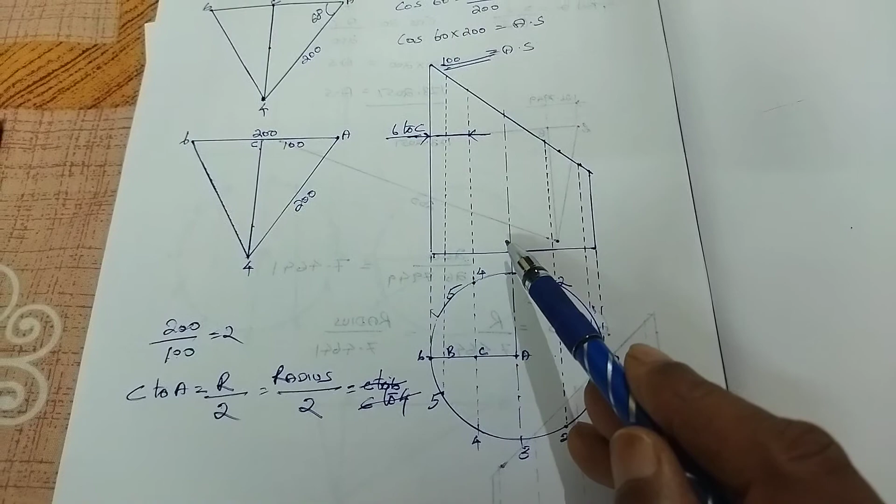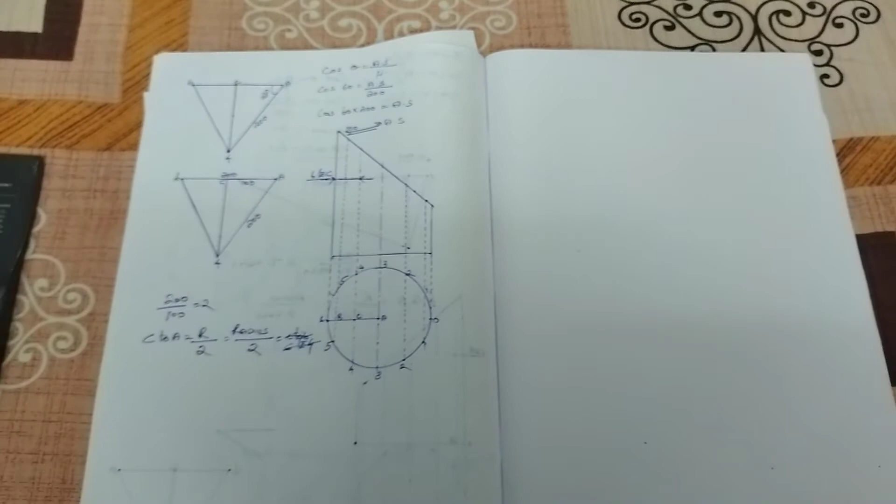So, unexpectedly, accidentally I was inventing one more formula. So remember this formula: C to A is radius by 2. This is my second invention. Now I told you about 2 accidental inventions. In other episodes, I will describe other formulas I have invented. Not that I invented anything; everything was for speedy works, for my necessity, for easiness. You are also in the field of inventions. We should be able and expert in our own fields.